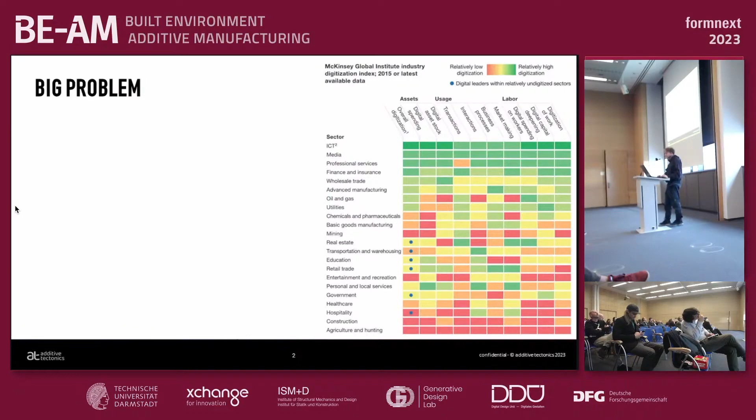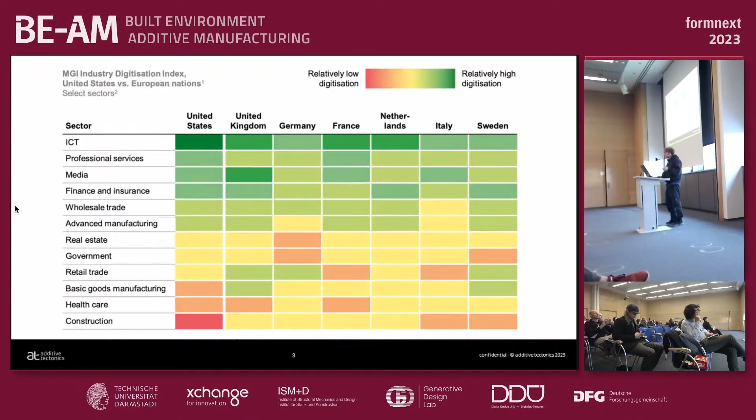Because we are in construction, we are additive manufacturing that goes into construction, and this is quite exciting. So what we do is we work on developing the future of construction, architectural 3D printing, and I hope we all agree that it's at least part of the future of construction.

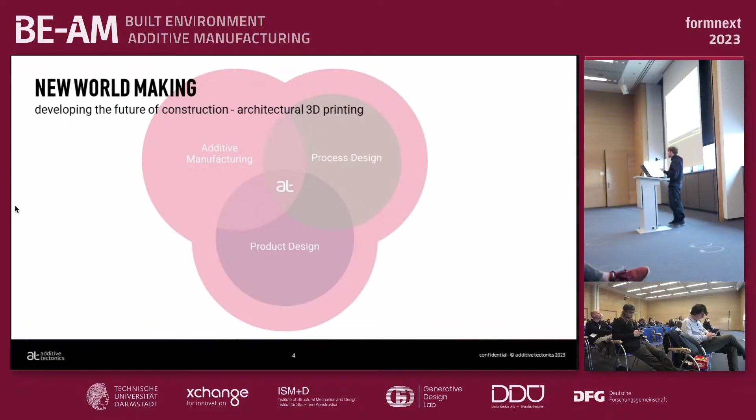And we do this by actually putting additive manufacturing at the center of process design and product design. I will talk a bit about what that means. So it's not just about the 3D printing part of it. You have to also design the processes before and after to be able to make products. And of course, you have to design the products, because an architect right now, a classically trained architect, can't do this.

And we do this in an environment that faces big issues. We talked about this a lot, so I will be quite quick. We generate huge amounts of waste. We don't have a lot of people on the construction side, at least in Germany. People don't want to really go into this environment anymore.

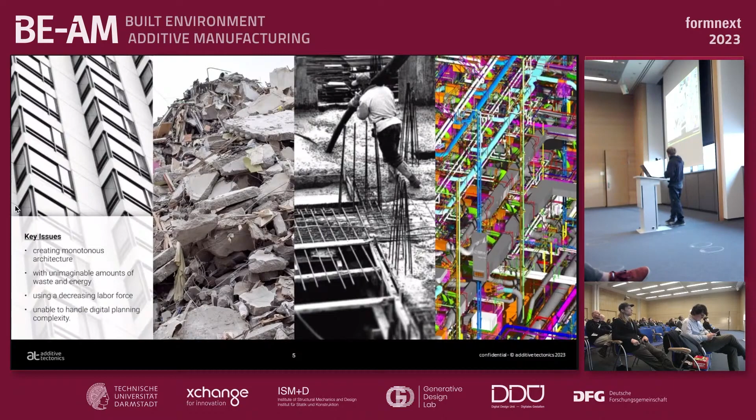And then when you start to digitize this thing, it becomes complex quite quickly. So methods are lacking to actually bring this complexity from the digital realm into the physical realm. And then also through modernism, we basically ended up with a pretty monotonous way of doing architecture that hasn't been done in other styles before. So these are the key issues, and we also have to kind of emancipate away from modernism to actually be able to apply these technologies in a correct way.

And we at Additive Tectonics, we do it in a co-design cycle. It's kind of something that I caught onto in Stuttgart, where I studied under Achim Menges.

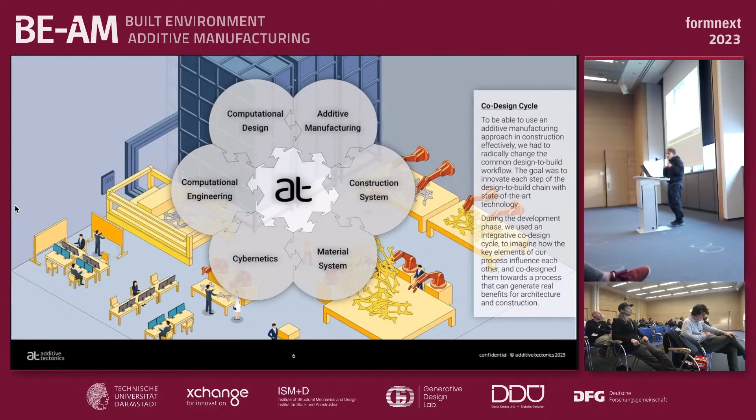And so in our team, we are very interdisciplinary. We have the computational engineering, the design, additive manufacturing, but we also develop construction systems, for example, with Autodesk, and also our own material systems and the cybernetics, which in this case means how our machines communicate with each other, what type of silos you need to actually be able to industrially additive manufacture at scale. And we need to do this because additive manufacturing is super complex.

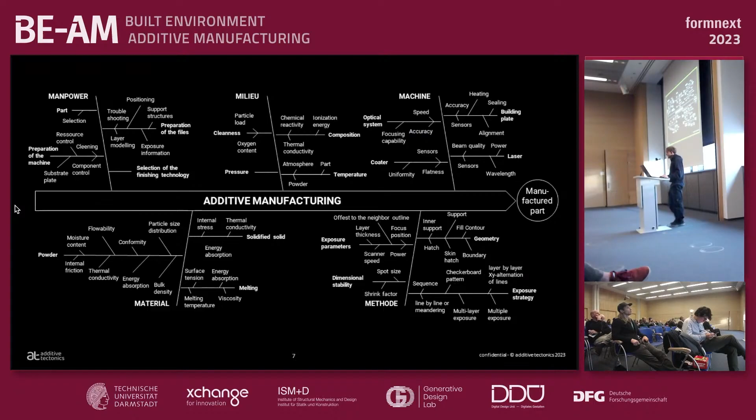If you look at all of the parameters that go into, that you kind of have to control to make a manufactured part, you see that these parameters are very, very tough to handle, especially by only one profession. So this is why we assembled a quite interdisciplinary team, and also pretty young team, because it is kind of a young people's discipline.

Okay, so what are we doing? We actually focus on 4 main topics: metals, concrete, or let's say hydraulic binders, wood. So basically all the big construction materials, and of course automation and computation.

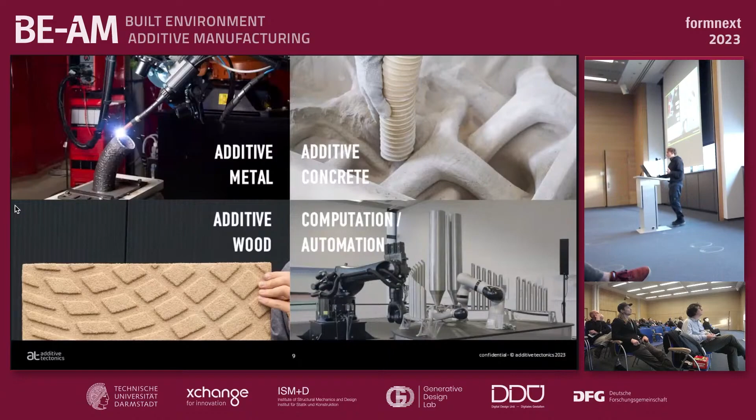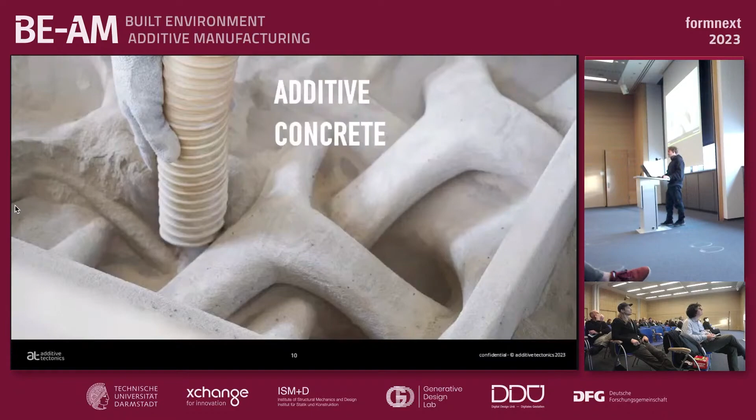I will start with additive concrete, and then we can talk a bit later about other things. For us it started at TU Munich, where the selective cement activation technology was developed, and we had in the lab a 50 by 50 by 50 kind of SCA printer.

This technology works by mixing aggregates and the binder inside a powder bed, and then you activate it by basically jetting an activator onto the particle bed. The interesting part here is that we can be quite precise, up to millimeter precision.

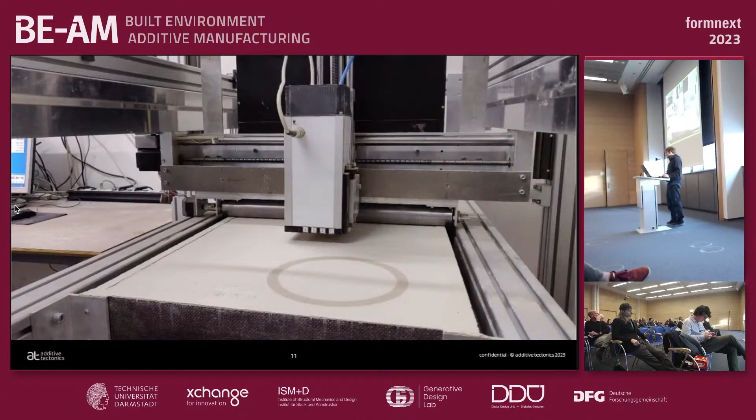This is pretty insane for concrete or cement manufacturing. What was lacking was the size, so we teamed up with a construction machine company and scaled up this machine. Our print bed is 10 cubic meters, 4 meters by 2.5 meters by 1 meter. It's the first and only type of its kind that exists in the world right now that is that big, that fast, and can print with construction material.

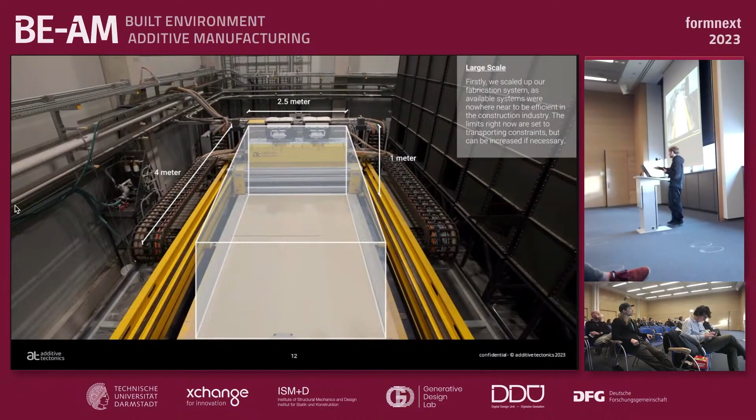This is important because you have binder jetting technologies, but most of them are not made to work with construction materials. If you go the route of getting a permit to build, you need to work with construction materials. This machine is also super fast, we range between 6 and 9 hours for 10 cubic meters. I'll tell you later what this actually means.

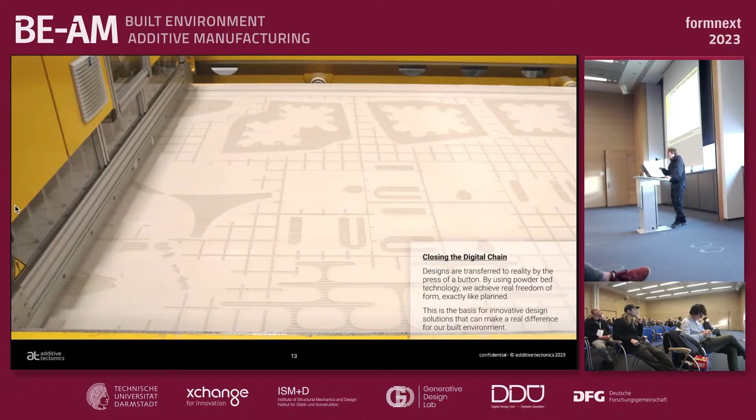One very important step I learned at TU Munich is that 3D printing basically closes the digital chain. You can have a completely digital process to make a part and put it into reality without a big margin of error and a lot of human interference. This closing of the digital chain is important if you want to bring your parts from BIM out into reality, or from a computational framework into reality.

Here you see a prototype of a facade system we developed for a project in Regensburg, supposed to be 3,000 square meters of facade. It's basically just a fancy shading system, and I don't want to talk about the architecture behind it, but I'm super proud to say a thing like this could be fabricated in 2.5 hours.

This makes 3D printing suddenly become construction relevant, because you have to calculate costs against your machine capacity, and only if you scale up with speed and size are you actually able to be a real player in the construction field. But for us it wasn't really only about the aesthetic possibilities.

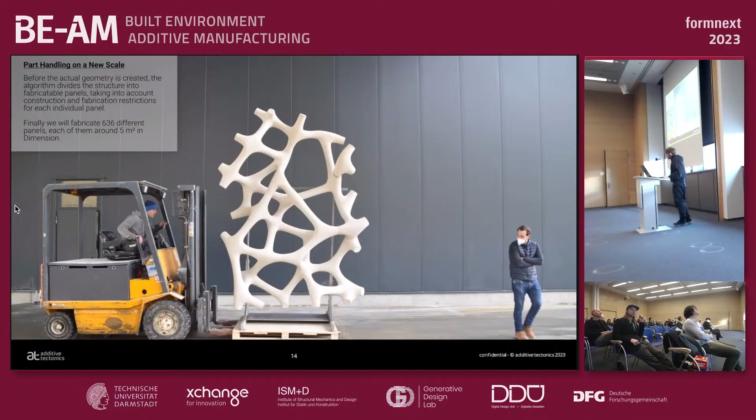We also wanted to integrate functions, and we know this from 3D printing: our volumetric designs, our internal structures that help us steer the function of a construction element. So we wanted to boil it all together to get multifunctional building elements.

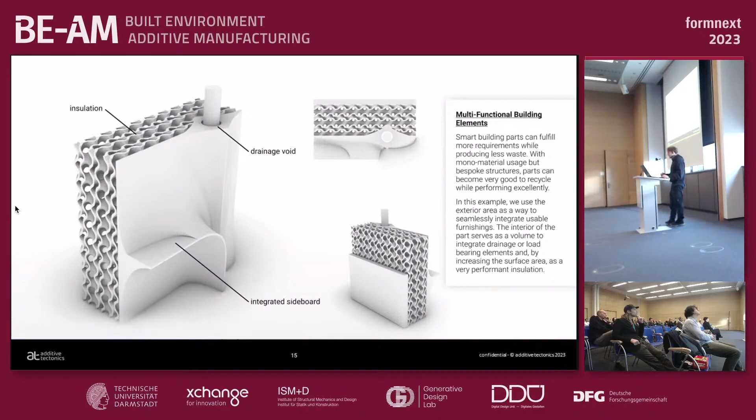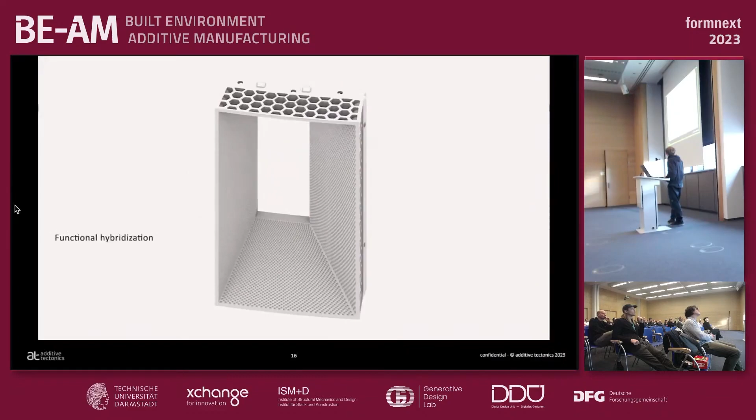There we teamed up with TU Munich, and Dirk Lowke was telling a bit about it. I just want to show you the video and talk a bit about it. It was inspired by Marcel Breuer, a modernist architect and designer, and we wanted, for the first time, to see if we could really functionally integrate building functions into an element.

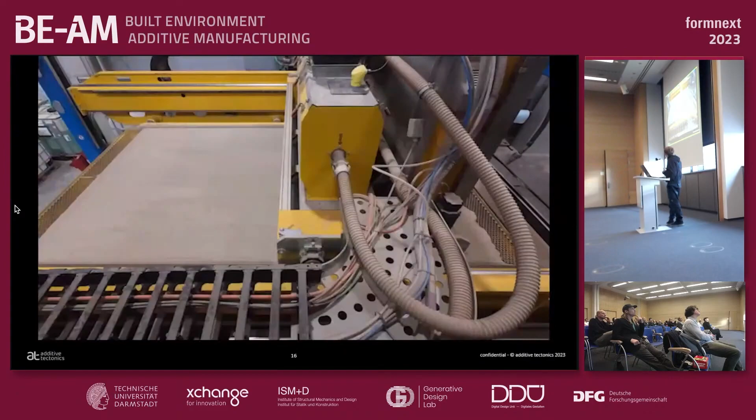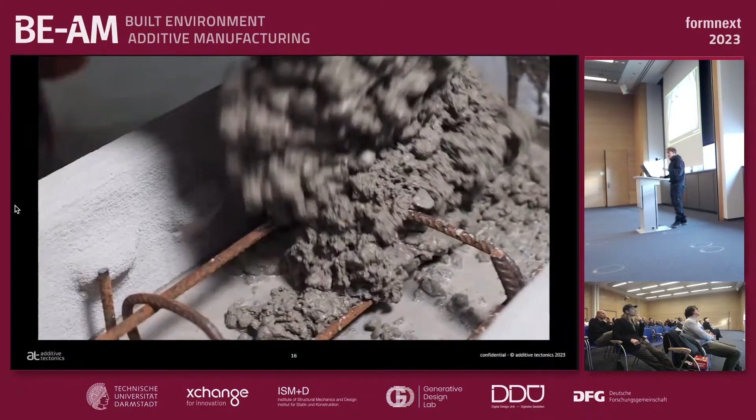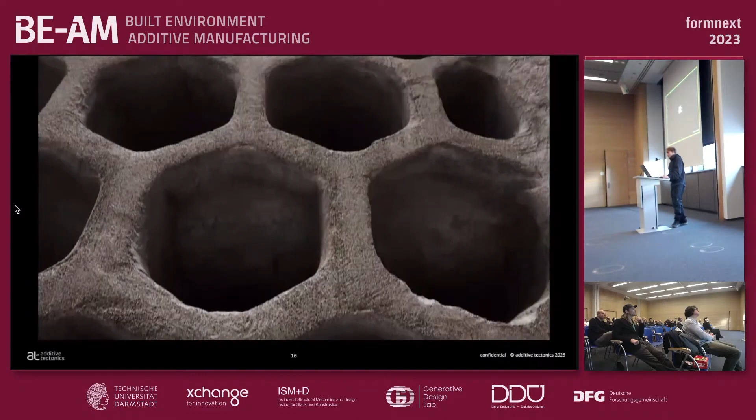You saw that we also analyzed how heat is transported through our elements, and how we can use these structures inside the element to gain a benefit, in this case insulation. You also have the solar potential of self-shading, and a lot of other interesting principles that can be solved with additive manufacturing, especially the curvature.

In my opinion, it's the first time you can really see additive manufacturing being applied like a prefabricated building element that has a certain extra value to it.

So in a recent paper, you can actually read on why we chose certain structures. It has to do also with our depowdering process, because after the print, this part basically gets taken out of the machine in a big box, and then you have to suck out all of the unactivated material, and you use this in the next print. This unactivated material is in these cells, so we have to get it out.

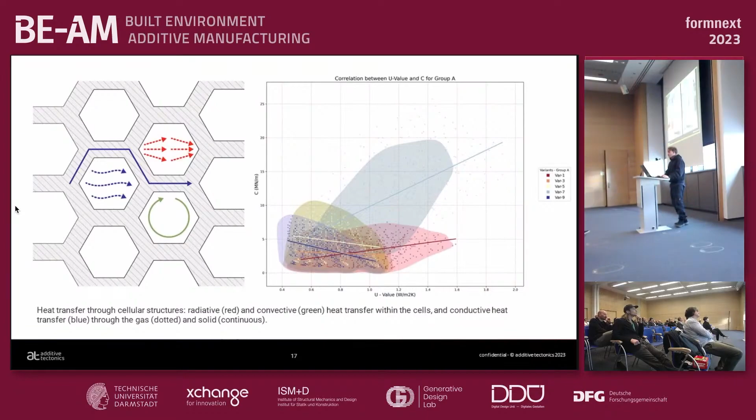And it was the first time that something this big and this high res was actually printed in concrete, like it's standard Portland concrete. And there you have some problems with baking - the material basically bakes inside and it's really tough to get out. So we are really working on this, but in my opinion it's already very convincing, even though it was our first real prototype that we did in cement, in standard Portland cement.

Of course, you could use other binders, but we wanted to have something that's very available, and we wanted to see if we are able to actually build an element this size in one go. So this element took 9 hours to print. This has to do with the compressed material, and the water tends to penetrate slower than with other materials. So it's actually our slowest print - we could also do this in 6 hours with other materials.

And you see that in the back, it's reinforced.

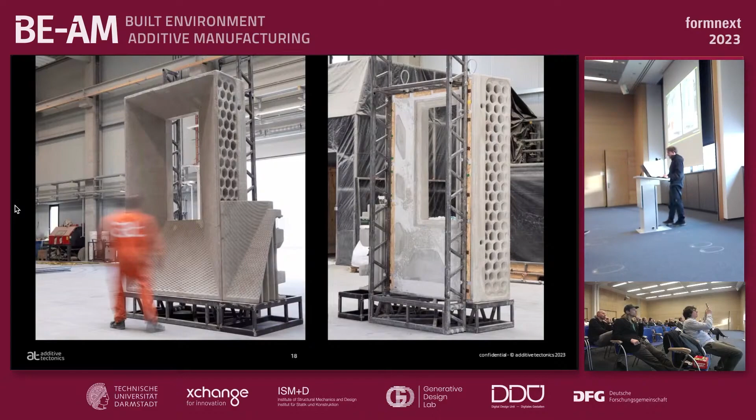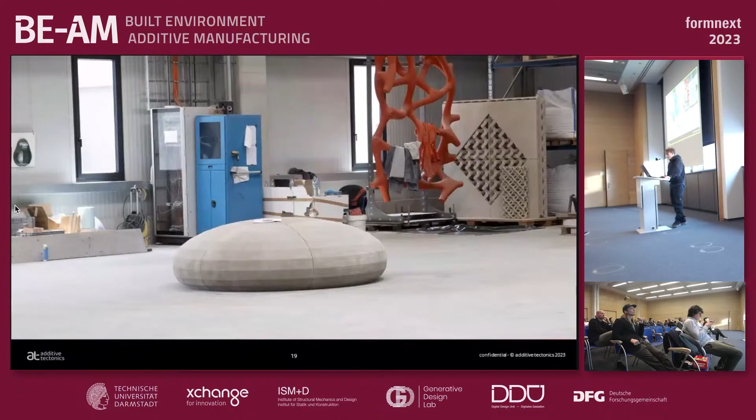And of course we also did other projects. This is an art project - it's supposed to be a blood cell. And this is just the smallest piece. We actually did one about 5 times as big like this. These are the small projects that you kind of have to do to validate your technology.

And then there, I don't know if you see where the 3D print is - it's quite hidden, it's these mushrooms. There you also see a bit of our facility, how it looks like.

The problem we are facing right now is that all of them broke - the mushroom broke, the blood cell broke, also the big element broke. And this has to do with microcracks that happen when you unpack these parts, and this we could only know by doing it big. There are effects that happen, like you have microcracks that let you handle the part, but as soon as it's outside, these microcracks tend to widen and get bigger, and then the part fails.

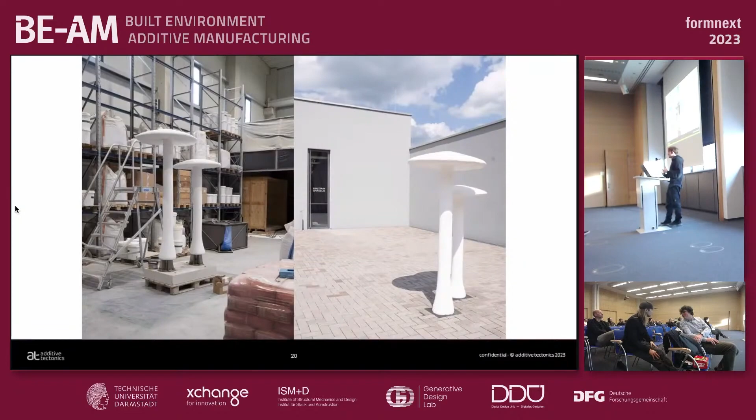So this is the stuff that we're right now trying to figure out, really going into projects and seeing if we are able to realize them and learn from them and adapt them. Okay, Portland cement, pretty complicated. Wood.

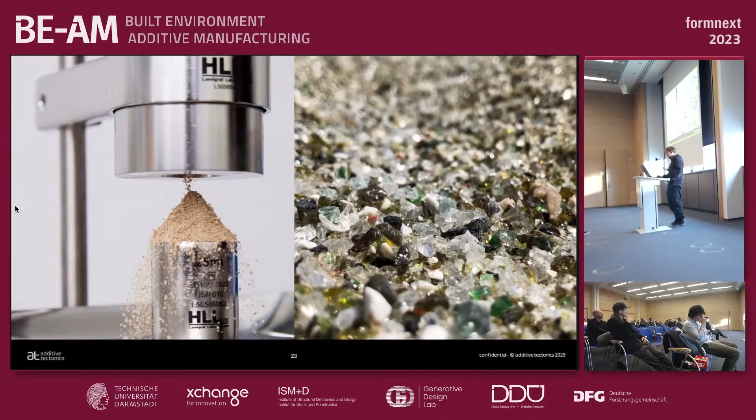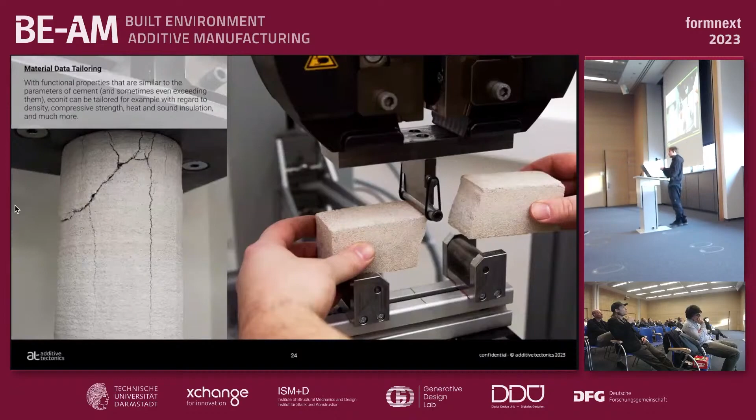So with the last projects, we developed our own printing material, which is kind of expanded glass from bottles that had their life cycle basically extended, because these bottles normally just have 5 cycles and then they are trashed. We basically use this old glass - there are companies that make expanded glass out of them - and we tailored the material together with cement to get a 3D printed material out of it, out of basically recycled glass bottles. Patrick did all of the material tailoring, gathered all of the data that we had to actually know if we are able to print such a large element with it.

But in this process, we also noticed that we can do a process like this with a lot of different materials - wood chippings, brick, sand, limestone, a lot of possibilities. And we were like, wow, this is really something. You can use waste materials, local materials from everywhere and print with them and make real construction elements at speeds that are relevant for construction.

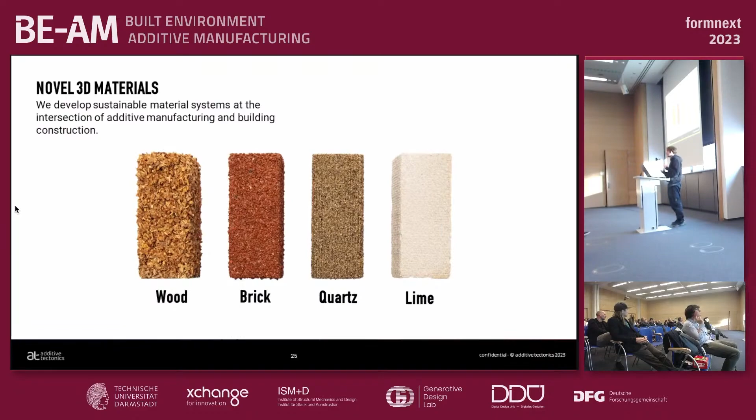But then reality hit again, and we looked at our setup that we developed during COVID. Basically you see these brutalist buildings are silos, and they stand on sensors, and you have a mixing and material pumping station in the middle, and it's constantly supervised.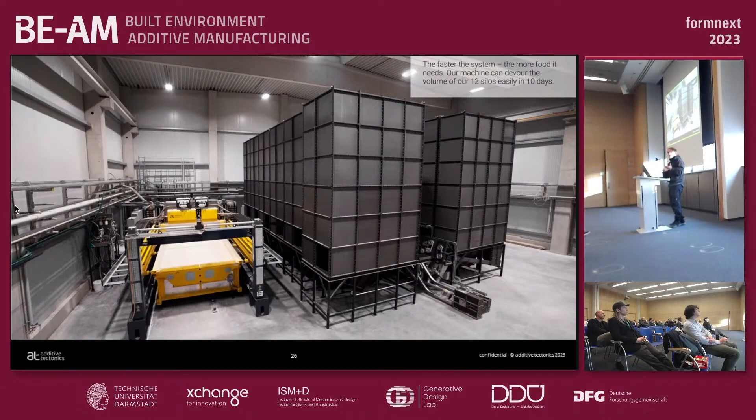And if you want to do an industrial machine, an industrial setup, you have to do it like this. But then, once you have it industrialized, it's pretty tough to react to all of these different materials, because your machinery might not be able to handle all of the little chippings and different sustainable materials that you want to work with. So we had to focus, and we focused on wood.

So what you see here is a material that we call econitWood. It's a magnesium wood hybrid. Basically, you have beech wood chippings inside, and you bind them by using magnesium oxycement and magnesium chloride.

The interesting part here is that you use this magnesium binder, also as a flammability retardant for wood. In German we call it Sauerkrautplatten. These plates are made of wood, and you use these magnesium binders to actually protect them from fire. So our binder doesn't just bind the wood, it also makes it fireproof. And we are right now elaborating the acoustic properties of them, but it looks pretty good.

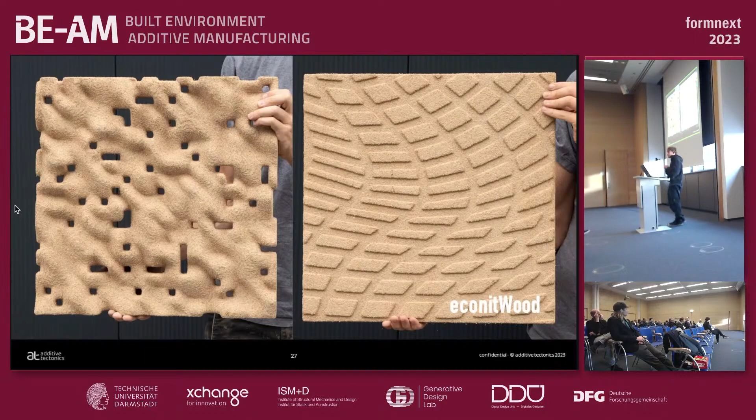The interesting thing is that if we fill the machine with acoustic plates like this, where every plate could be different, a plate 50 by 50 centimeters, 2.5 centimeters thick, would take 40 seconds to fabricate. So suddenly we are in a range where additive manufacturing can be scaled and applied to construction.

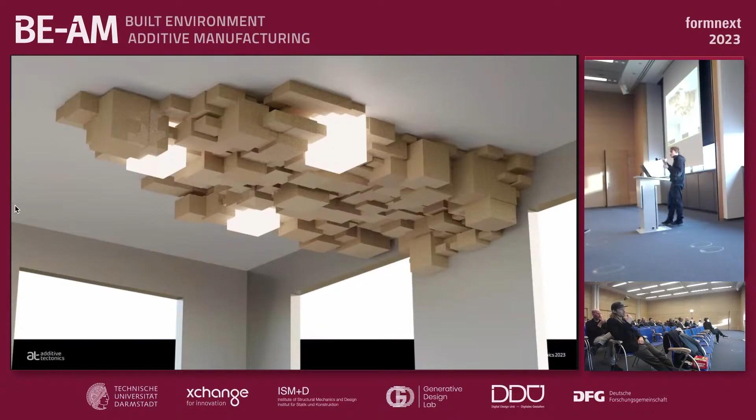Okay, so technologically it's possible. The problem is that everybody comes to you and says, let's 3D print this, let's 3D print that, let's do an art project, let's do something really crazy. But this is not how you make money. This is not sustainable. So how you can actually bring this power onto the streets is by making products - products that need additive manufacturing, where you actually develop the whole process from the design to the finished products.

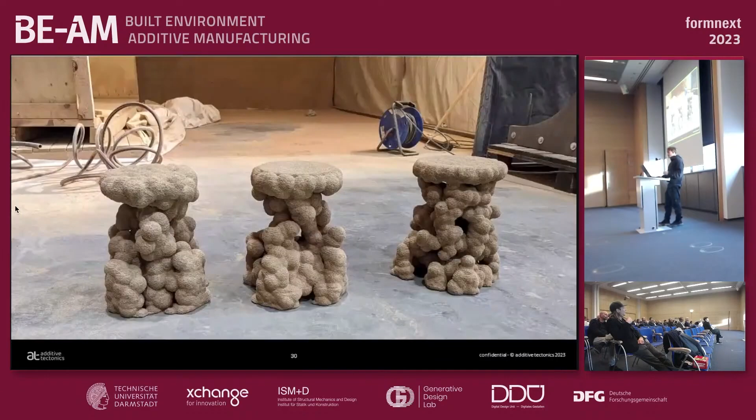Yeah, so we are in the process of doing that. I have to speed up a bit and develop basically these acoustic products. But there's of course a lot of other potential with these wood products that need to be explored. And if you want to help us making products out of 3D printed wood, we are happy to work with you. Especially because this biomass doesn't need to be beechwood - it can also be something that grows quick, that harvests a lot of CO2 from the atmosphere.

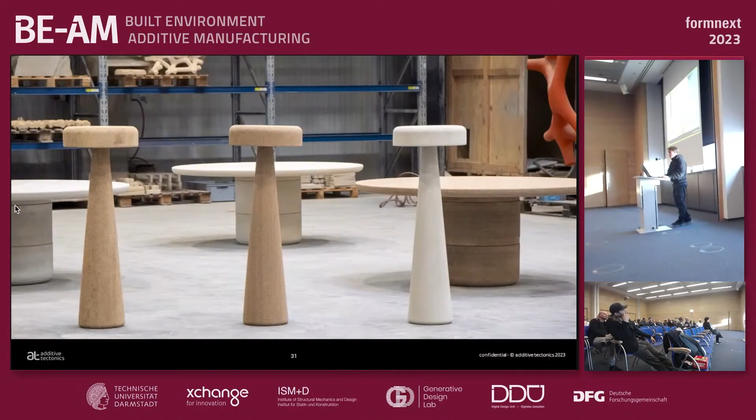Okay, let's talk about metal. I really have to speed up.

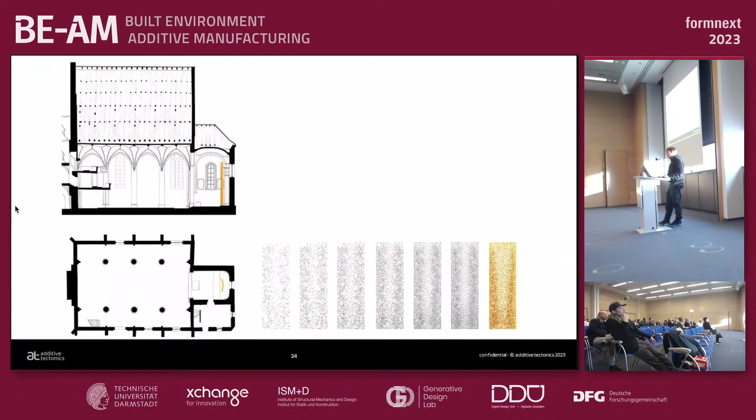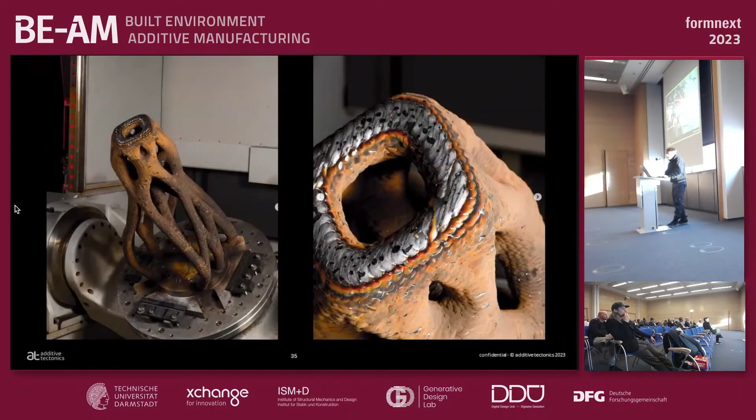So an artist group approached us and wanted to do a big altar project, and they wanted to do it in WAAM. We, together with our mother company, know how to do WAAM, and it would have been 5 times the cost that the artists expected. So we came up with a different way and used basically an SLS print and sprayed aluminum around it, did a lot of material tests.

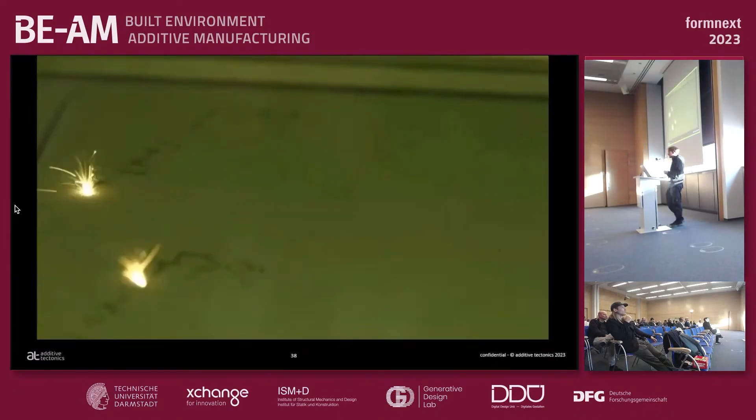So basically it's an interesting load case where that's kind of made up, but also made so that the structure has a certain aesthetic.

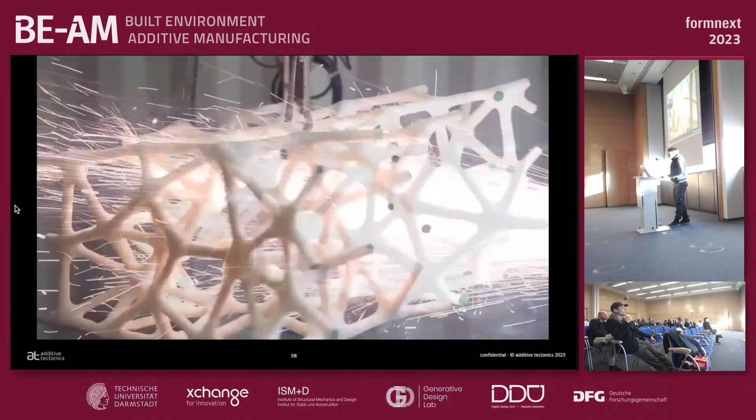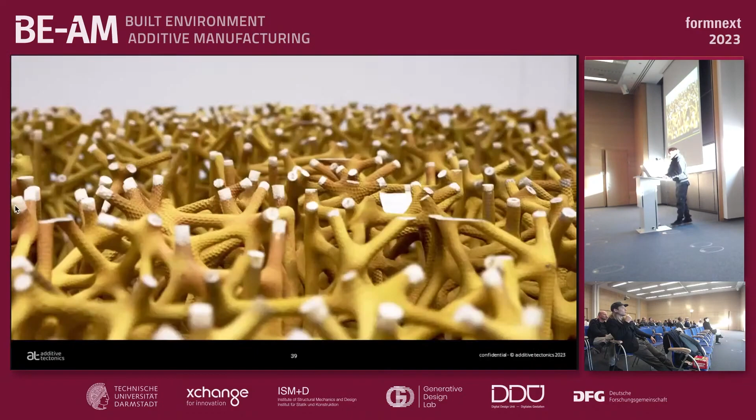And then there you see how we spray the aluminum around it. The aluminum is there to really reinforce it - we calculated the project just with the aluminum skin around it. And then we assembled it by hand. You see that it's a very complex puzzle, like 60 different pieces, each individual. And there you see the finished part in the church.

And it was actually, the Cardinal Marx came and praised it. I don't know what's the word in English.

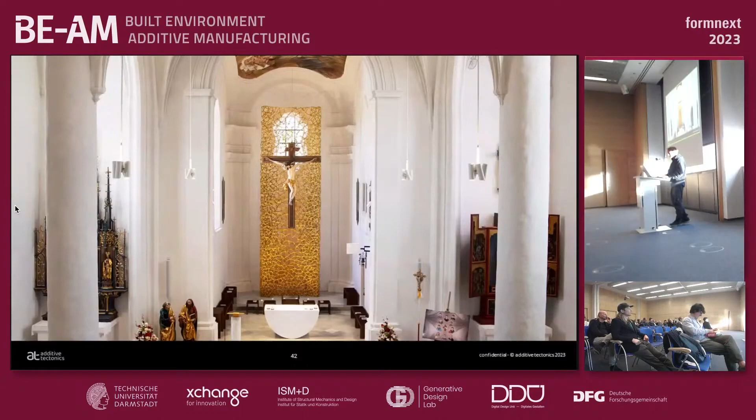That was quite interesting. Okay, so the last topic is computational automation. I will just tell you a story through a project - it's again an art project where we do FDM together with an artist called Peter Lang.

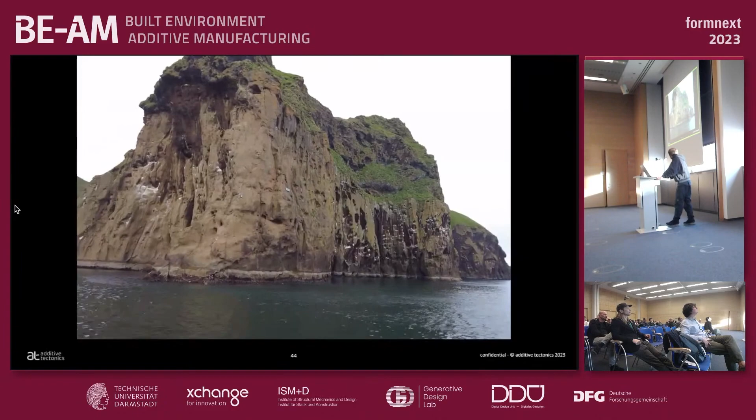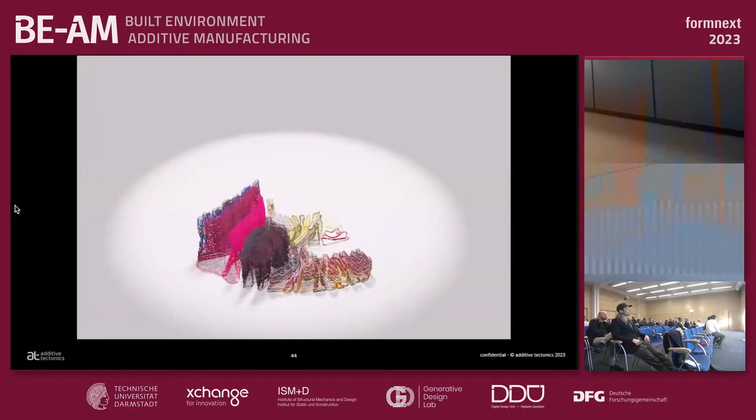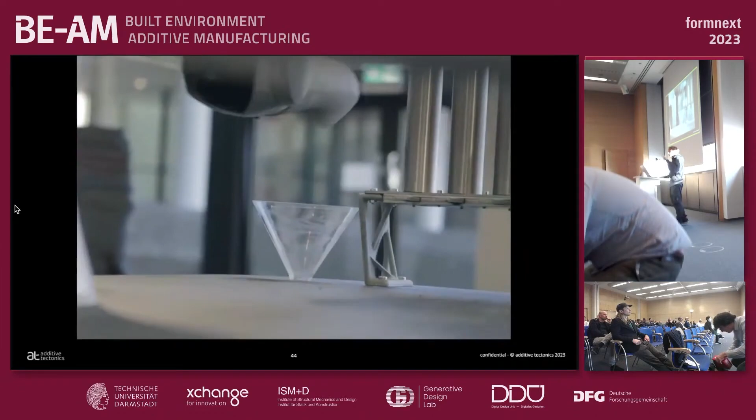He is a landscape painter, and he normally paints layered paintings, making very straight lines by snapping a string on a surface. So we said we actually do the same thing - you just have to learn how to model. He didn't want to learn how to model, so we made him a VR interface where he could actually paint his layers. And we made a custom setup for a museum where you could color on the go these prints, using the color code that he decided before in VR.

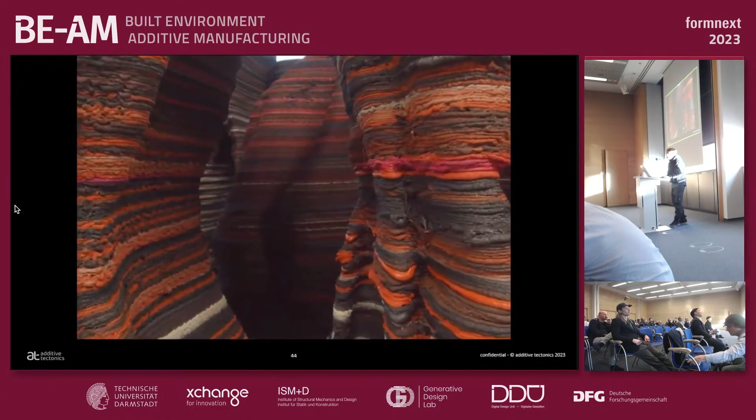So he was 800 hours in VR, and we printed 800 hours in Hannover. Actually, it's not just a coloring system for us - for us, it's a way to actually make a new material on the fly. You could grade a material, you could use 2 different materials. And you see that this is quite big, and for us it was intense because we printed it live in a museum.

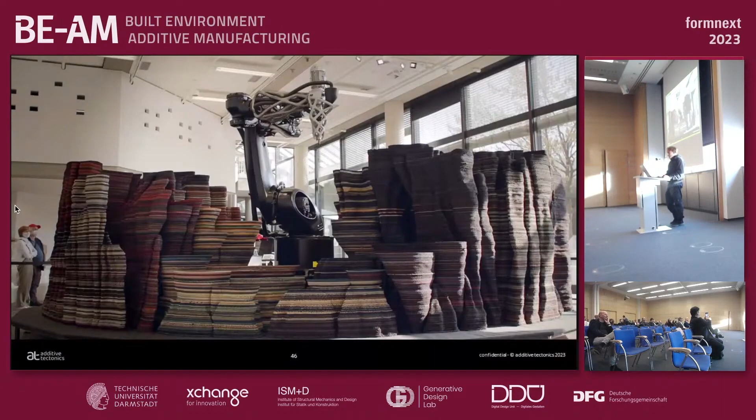Which makes you ready for industrial fabrication. Okay, but you see we overheated the material a bit to get an artistic finish. But we worked together with a company to also do it properly, to make products out of it. We know how to color things, so we use our wood material - the whole structure that you saw is basically a lignin-based polymer.

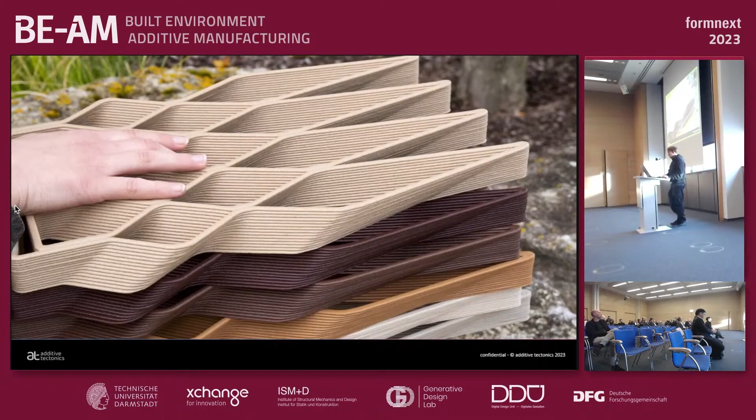We right now develop a range of products for these people that you might know, and we are quite excited about this range of products. Of course we want to push architecture, but running a startup means you have to start selling things on a consistent level. So we do very interesting stuff.

If you're interested to follow us, feel free to scan the code. And if you have ideas for our new wood material, I would be very excited to work together with experts in the field. I'm happy to be here. Thank you.